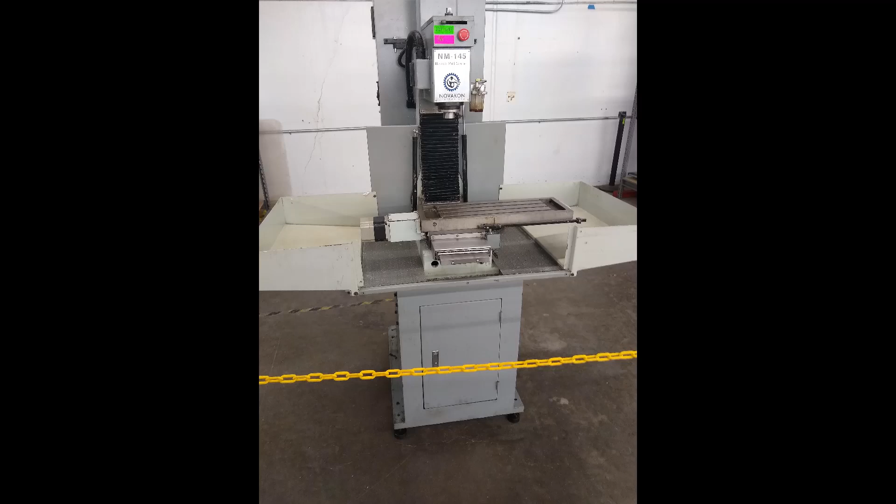Hello and welcome to my introduction to the CNC milling machine at Xerocraft. I'm going to be going over some of the basics of setting up the machine with a bit of an expectation that you've had some exposure to CNC machines, probably the CNC router, in the past.

Now the first step, of course, is to design the CAM or toolpaths that the machine will be doing. And to do that, we're going to get started in Fusion 360. Now, Fusion 360 is a fantastic software that merges 3D modeling with CAM or toolpath generation, and it's a very popular choice in the hobbyist and maker community because it is free for non-commercial use.

I'm not going to go into all the nooks and crannies of what Fusion 360 can do. That is far beyond the purview here, but I'll show you some very basic stuff. If you're unfamiliar with these sorts of engineering softwares, it essentially boils down to drawing 2D sketches and then modifying them, pulling, pushing, rotating them to form 3D shapes.

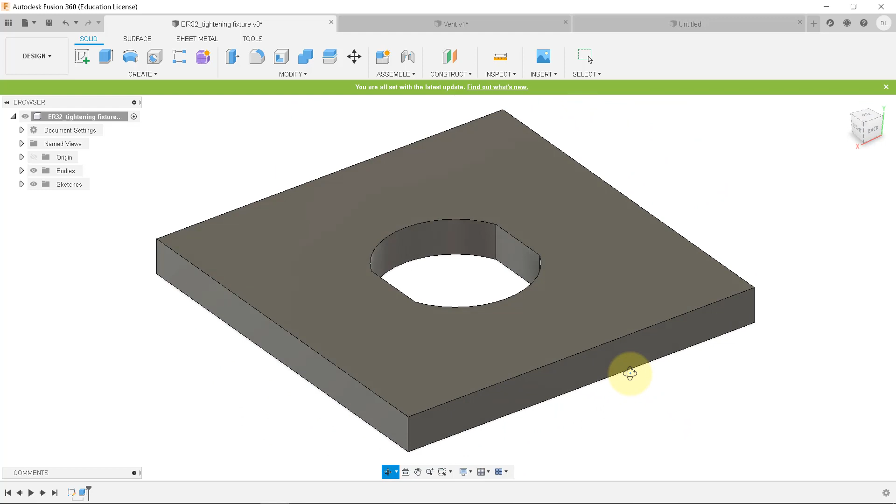And so I'm going to get started by showing you how to make a simple tightening fixture that looks like this. This particular part is very handy when used with the ER32 collets that I'll be showing you in a little bit. It helps to tighten the tools in the collets.

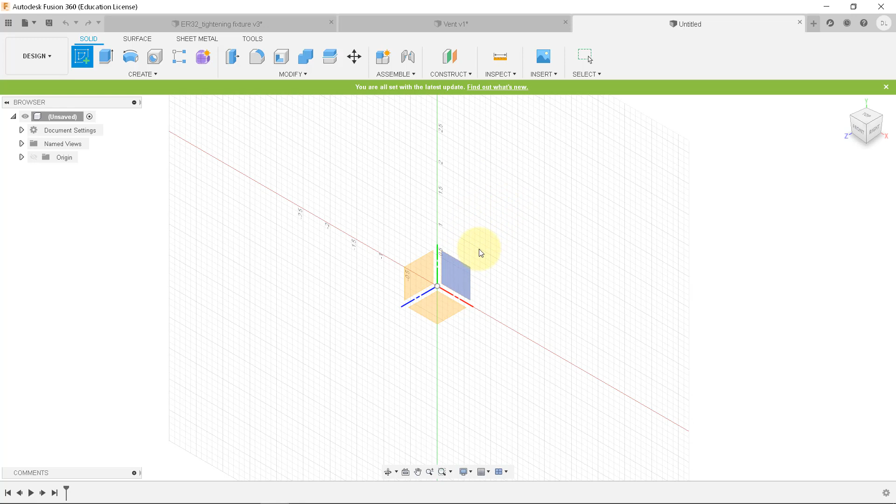So we're going to get started, as we always do, by creating a new sketch over here. The first part of drawing a 2D sketch is to define which plane the sketch is going to be placed on. And so I'm going to start here by choosing this plane. It doesn't really matter a whole bunch when we're first getting started, but I'm now going to use these 2D drawing elements to create my shape.

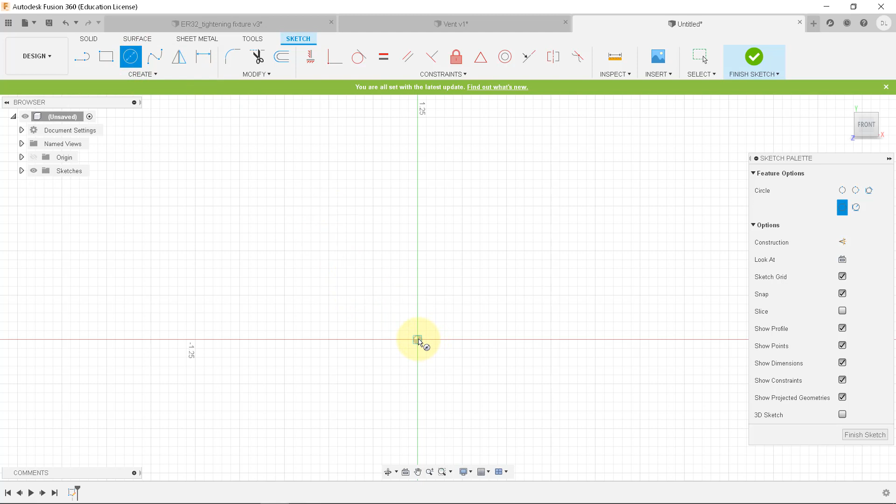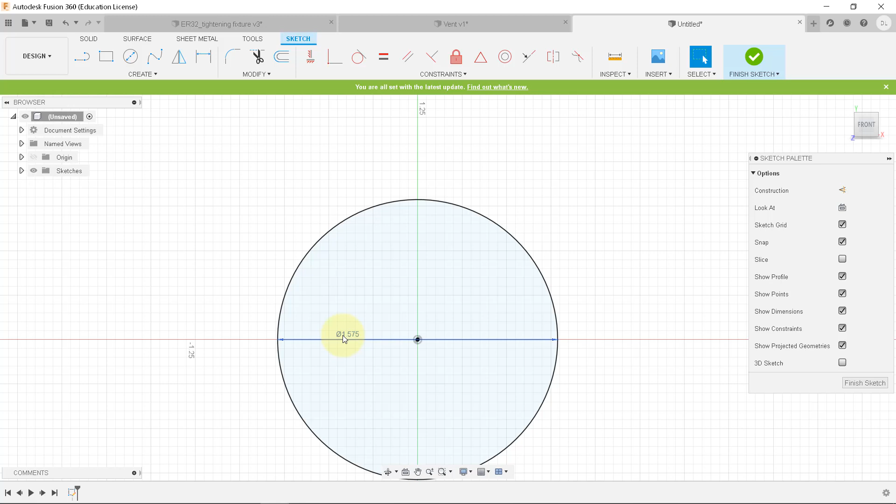So I'm going to first start with the circle, and so I can click once to set the center of that circle, and again to set the diameter, or I can type in the numbers. In this case, I know that that's going to be a 40 millimeter outside diameter, so I can just type 40 mm, and that will set it to be that number. Right now we happen to be in inches. We can change that up here if we want to.

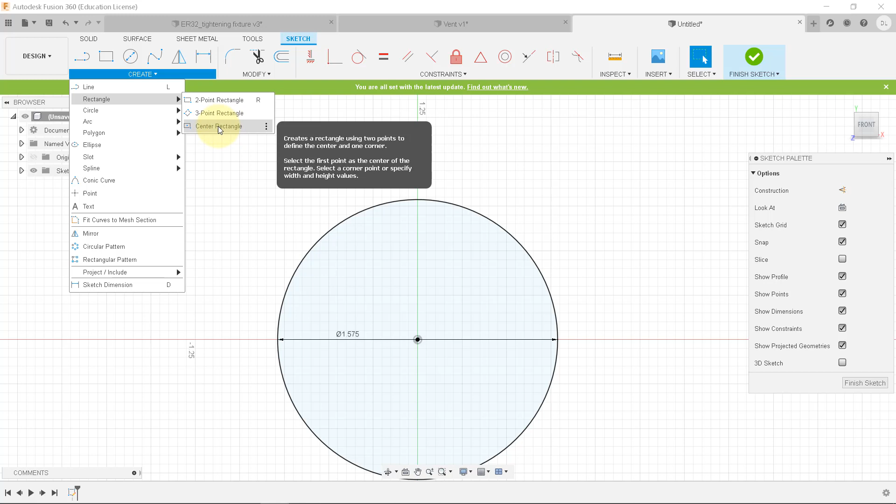The next step is to flatten two opposing sides. I'm going to do that by creating a rectangle. There's a few different ways I can define a rectangle, and for ease here I'm going to set this to be a center rectangle. So again, I'm going to click to set the center, and then I can either draw it out here, or I can simply type this here.

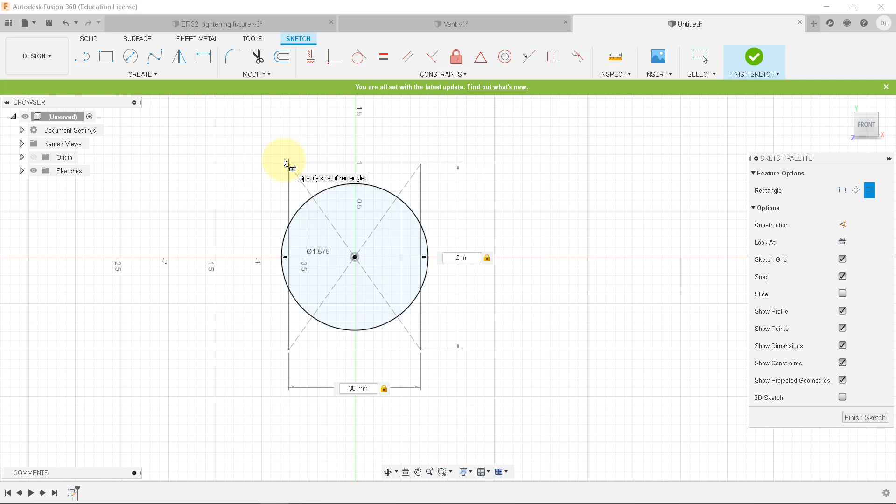Could be something like 2 inches, and then I'm just going to hit tab and switch over, and I know that I want 36 millimeters between the flats, so I'm just going to type 36 millimeters there and hit enter. And so now I have my parent circle and the flats drawn here, and I'm simply going to use the trim command to delete away all the line segments that I do not want.

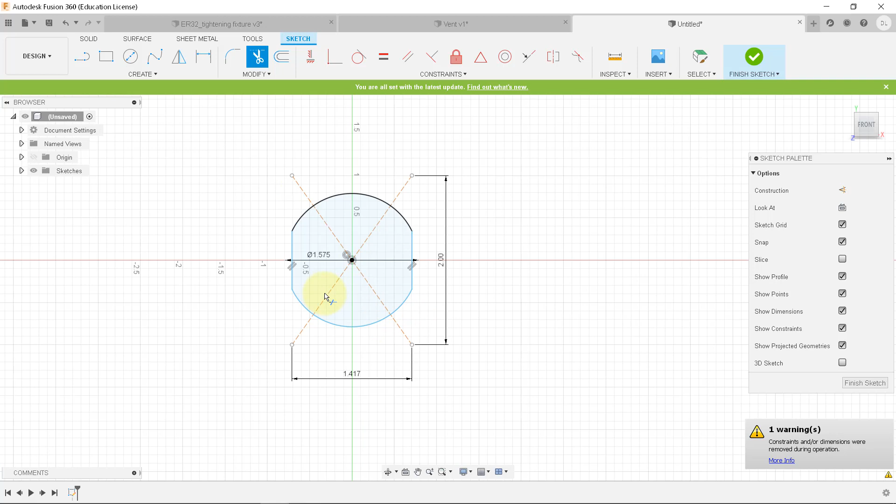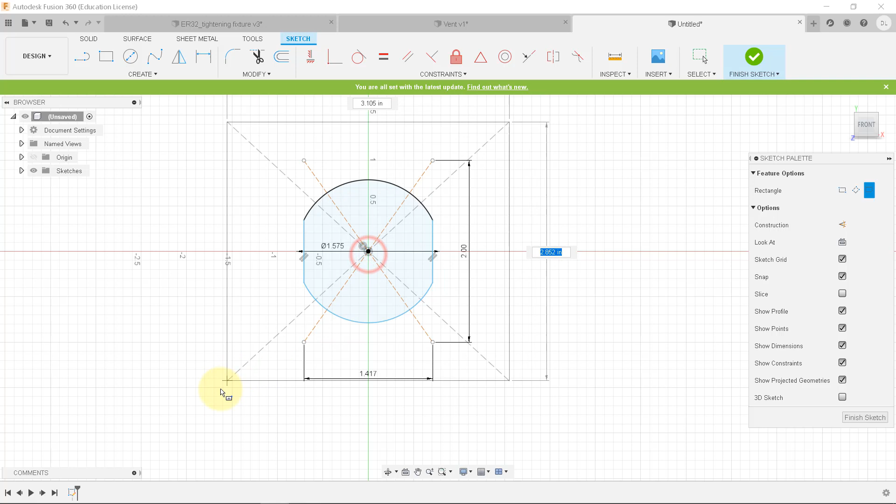So I'm going to delete all of these little extra sketches over here, that and that, and so I'm left with my parent circle with the ends chopped off. And then last but not least, I'm going to want to draw a box around this for the extent of this part. So I'm just going to simply draw another center rectangle, which I will set up here. And this is somewhat arbitrary, but I'm going to make this something like, say, 3 inches by 2.5 inches, just like that.

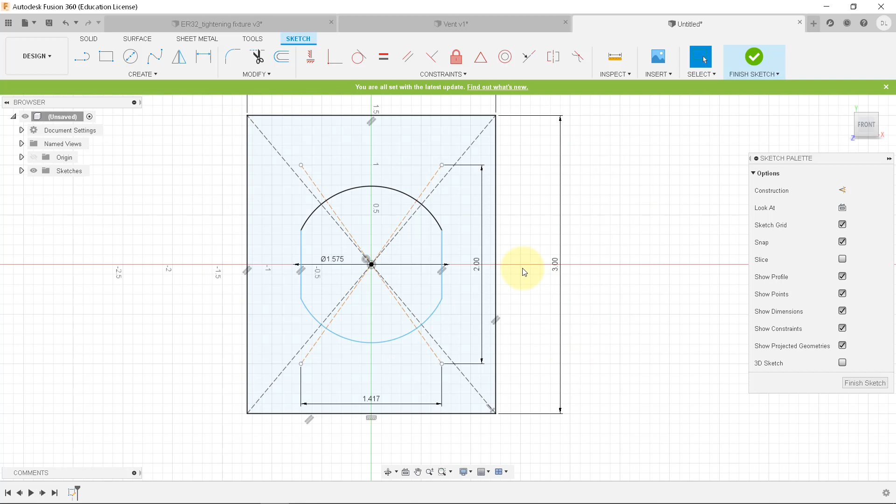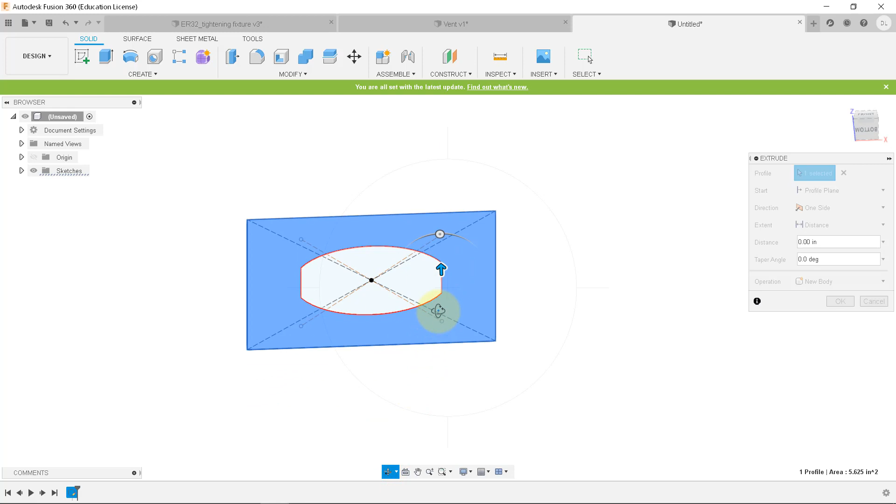And now I'm complete with my part, and so I'm going to say finish sketch. Now I have my two-dimensional sketch, and I'll do the most common thing to do, which is an extrude. So when I click on this surface here, now that I'm in the extrude command, I can now take that 2D sketch and extrude it into the third dimension. In this particular case, I'm going to use some material that's 3/8 of an inch, or 0.375 inches in thickness. And so I can now say, OK.

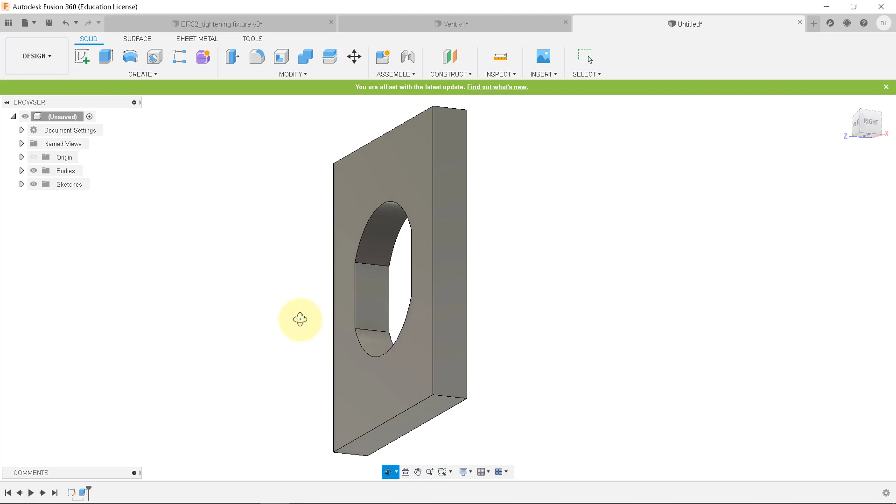And here is my finished design, exactly as I want it to be. And so now my 3D modeling is over, and it's time to switch over to doing the machining part. So that is as simple as going up here and switching from the design view to the manufacturing tab.

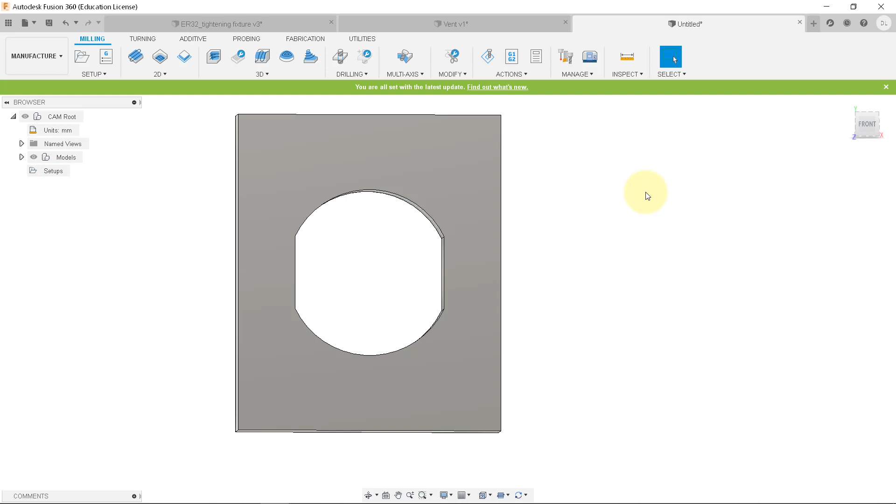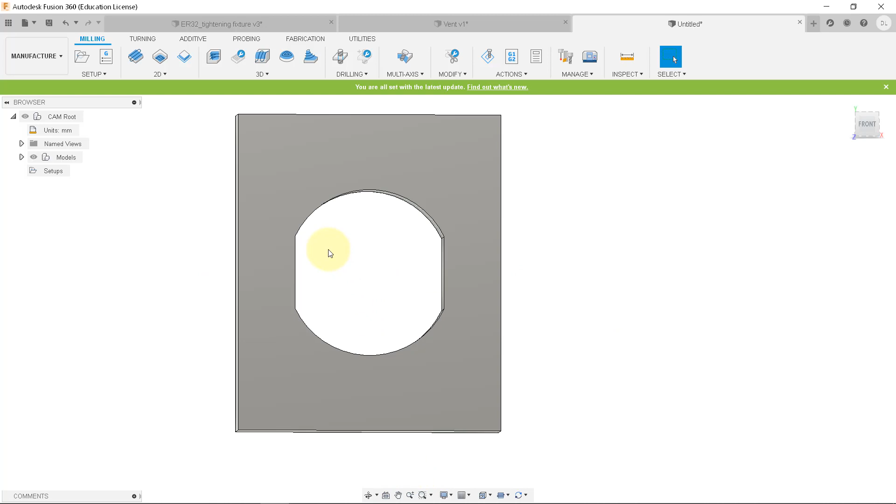And so now we have a whole bunch of new tools up here at the top that will help us set up the machining. And the first thing that we're going to have to do is to create what Fusion calls a setup, which is essentially describing what the material is and how the part is being held in to our machine. So I'm just going to go ahead and click Setup here.

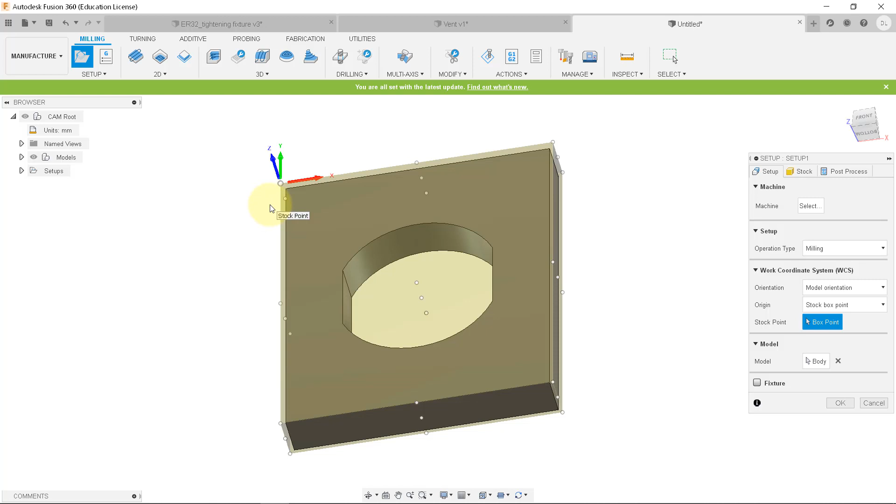Now there's a couple of things I'm going to want to change about this. First off, I'm going to want to use the corner to be the XY 0 point, because it's going to be a lot easier to accurately find the edge of my part rather than the center. The other thing I'm going to want to do is I'm going to want to define the X, Y, and Z coordinates a little differently because of how the machine actually works.

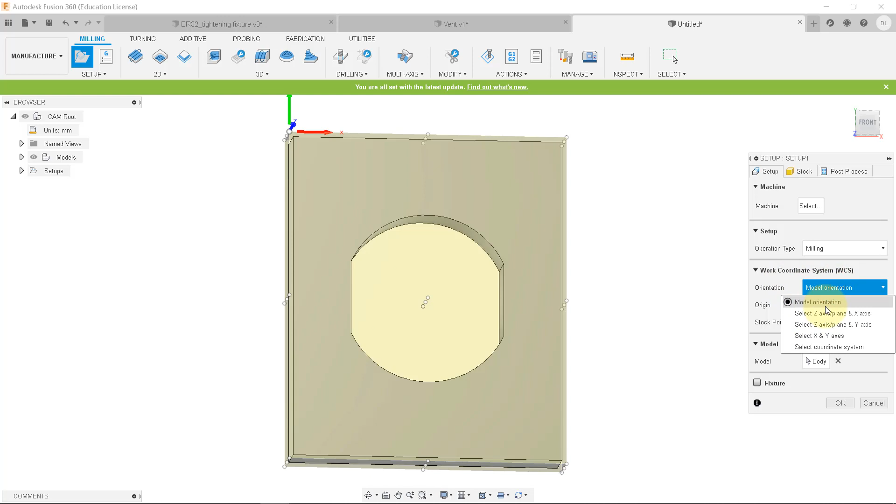And so basically what's going to happen is in real life the x-axis is going to be left and right as we're looking at the machine. The y-axis is going to be away from us and towards us, and then the z is going to be up and down. So what I can do is I can say for the work coordinate system, rather than having the orientation as it's defined in the model, I can just select my x and y axes.

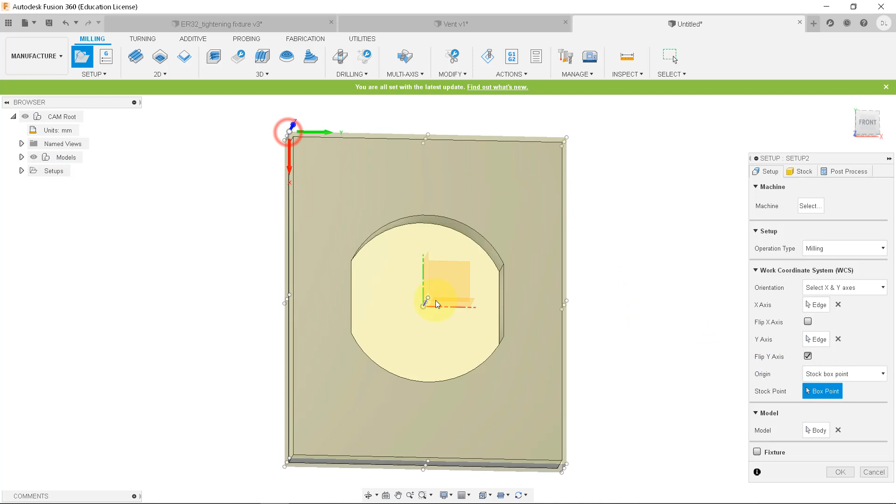So I can force the x-axis to be, say, this edge of that part, and then the y-axis I can force to be this way, which is going to make my life a lot easier. Now it looks like it's moved my origin point, so I'm just going to go back to selecting the stock, and I'm going to go here. And so now I've got it set up as I wanted. My x-axis is going to be running this way along the part, my y-axis going this way, and then z is going to be vertical straight up this way.

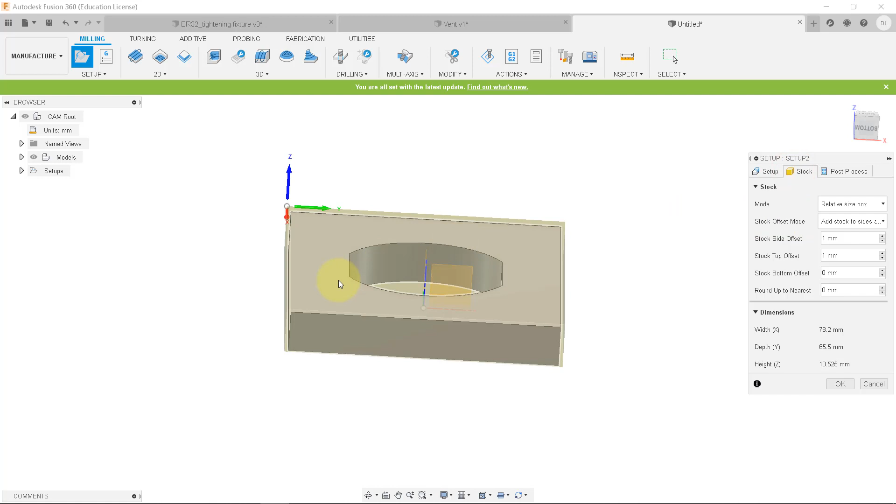Now, the next thing I'm going to do is I'm going to work with the stock itself. Now, it's very important that the software know exactly what size material I'm going to be using, because this program is going to be making assumptions about where it can be moving quickly, safely, and the last thing I want to do is have it think that there's air in a place where there's actually metal. And so it's very important that we give it those precise dimensions.

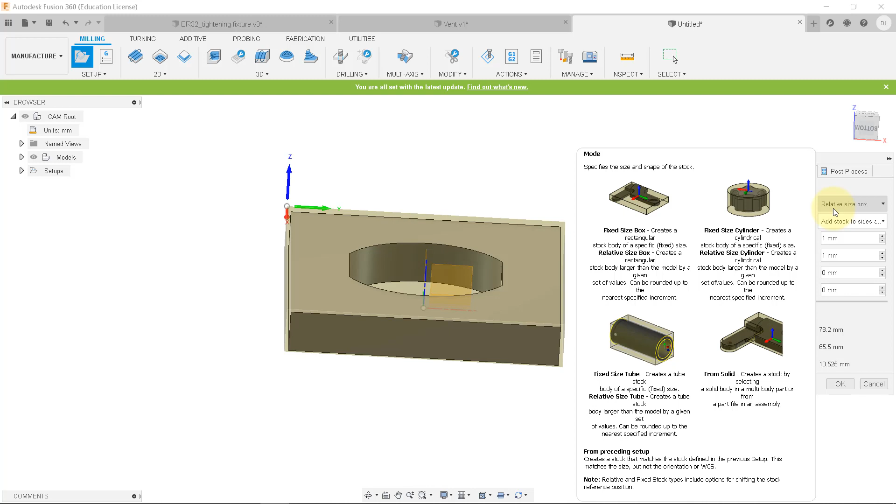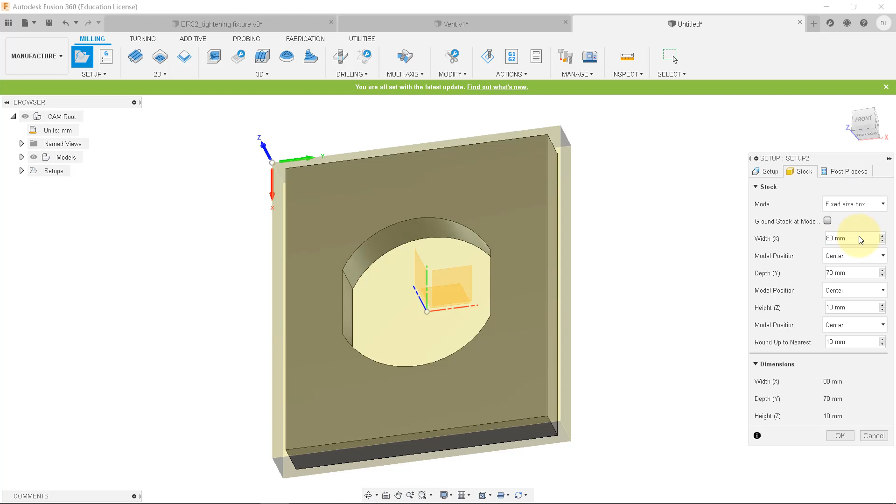Now you can see it's defaulted to a relative size box, where it's just assumed that the material I'm starting with is just 1 millimeter bigger in all the axes than my finished part, which may not be true. And so in my particular case, I'm actually going to go ahead and use a fixed size box, which I can define based on measuring the exact piece that I'm going to use, and that is simply going to be something in the neighborhood of, say, 4 inches wide by a depth of 2.5 inches, and there is my material all set up and ready to go.

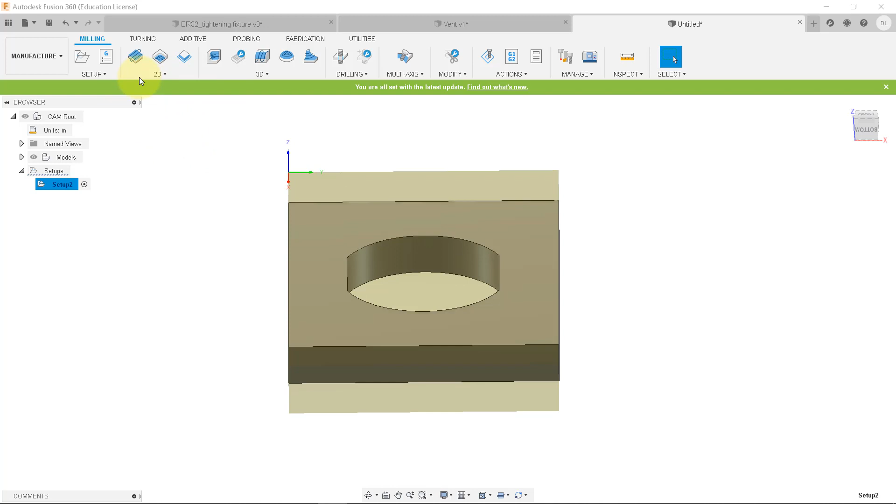Now, because we live in America and all of our tools and setups are going to be in inches, I'm going to switch the dimensions over to inches right here. And now we're going to set up the toolpath to create this pocket here in the middle of our piece. And because this is a two-dimensional type shape, we're going to use the 2D operations and do a 2D pocket.

Now, no matter which of these strategies we use, the first thing that we're going to want to do is tell it what tool we're using. So I'm going to click Select, and that's going to pull up the tool library. And you can of course create your own tools, but the ones built in are a pretty good place to start. So I'm just going to start with a sample tool in the inch dimensions.

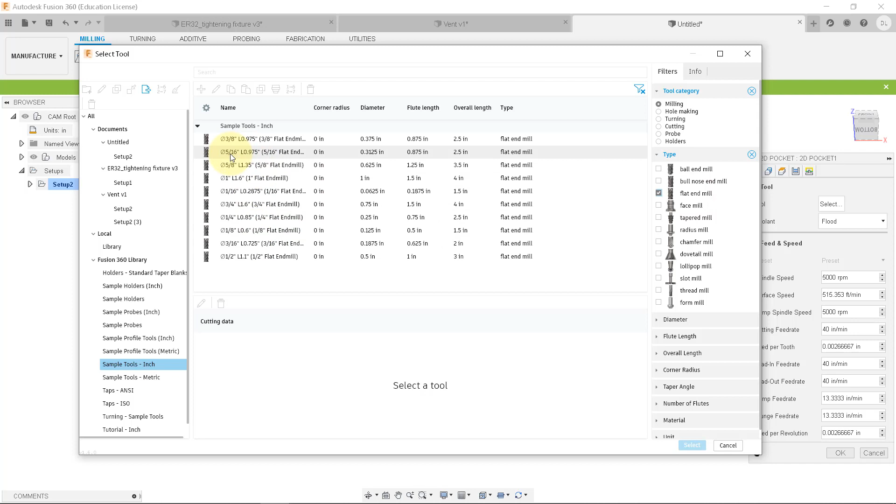I'm going to filter to milling tools by flat end mills, and here is the 5/16 diameter tool that I'm going to be using for this part. And then down here I can select what material I'm using, in this case aluminum, and what sort of strategy I'm going to be taking, and this is going to be a roughing strategy.

And so that has propagated all of these parameters about the tool, both its geometry and how it wants to be run. So I'm going to select this here, and that's propagated all of these feeds and speeds information into our spreadsheet. The problem is that the machine that we have has not got the fastest spindle in the world. And so while 12,000 may be doable, in our particular case the machine can't go any faster than about 5,000. So I'm going to have to change these numbers here to about 5,000 RPM.

And what we'll see is that this computed surface speed, aka the speed at the outer edge of the tool, has come down quite a bit, from almost 1,000 feet per minute to 400 feet per minute. This is one of the critical numbers that you'll want to look up if you have to come up with these speeds and feeds entirely on your own.

Now the next thing that I'm going to want to do is, because I reduced the RPM of the spindle, I'm also going to have to reduce the feed rate in order to maintain a safe feed per tooth. This number is again something that you're going to want to look up from the manufacturer of the tool. Generally speaking, a larger tool can take a bigger bite, and softer materials can be chewed more aggressively.

In our particular case, I'm going to go with a pretty conservative 1/1000th of an inch, and that's going to set my feed rate to 15 inches per minute. I could probably take double or even triple that feed per tooth, but I'm going to be conservative here and just go at a relatively slow speed, just so I don't embarrass myself breaking something. So I'm just going to change all of these other numbers to 15 inches a minute, and that's all my feeds and speeds set up.

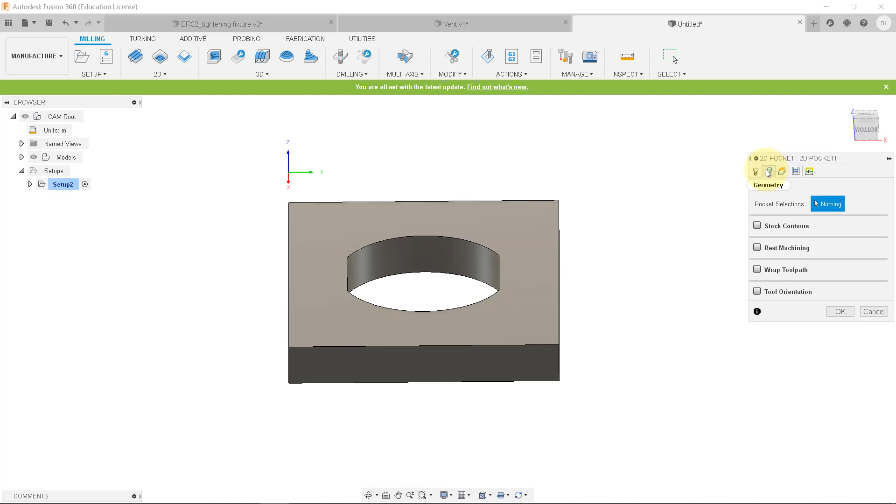Now the next thing I'm going to want to do is choose which geometries to focus on. So I'm just going to select the pocket here to tell it that this is where I want to be doing my machining. I can also set up things like heights, where it should clear to, how far it should go, etc. And I can also set up my passes.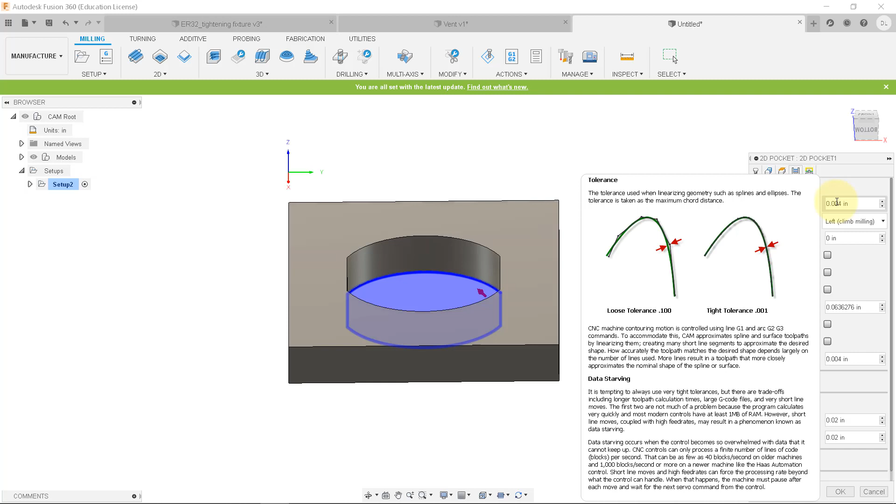This is really handy. This is going to help me out with stuff like how close I should get to hitting the exact shape versus simplifying the geometry by not producing 10,000 points along a curve. I can also do stuff like here, because this 2D pocket is considered a roughing strategy by default, it will leave a little bit of material for us to clean up at the end.

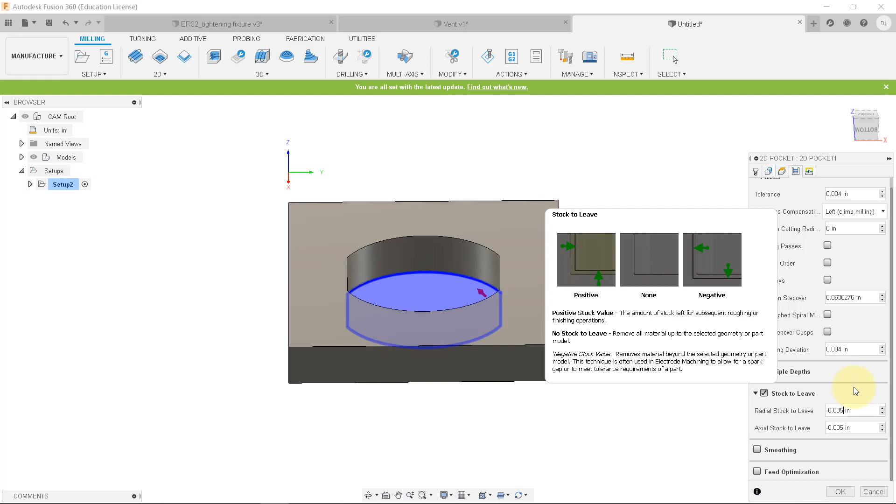Now, I don't actually care. I'm not going to bother with that. So what I'm actually going to do here is not just set this to 0, but because I want to make sure my piece fits, I'm going to choose to have actually a negative stock to leave here. So I'm going to intentionally cut 5/1000ths of an inch past where my line actually is, just to make sure that things fit nice and smooth into there without having too many problems.

Now, I strongly encourage you, when you're doing this on your own, to be pretty confident in most, if not all, of the parameters here. Fusion 360 has some great tooltip advice for you. So if you hover over one of these options, it will pull up a little preview explanation of what this means. It's very important that you understand what it's trying to do, because there are all sorts of gotchas here that you can get yourself in trouble for.

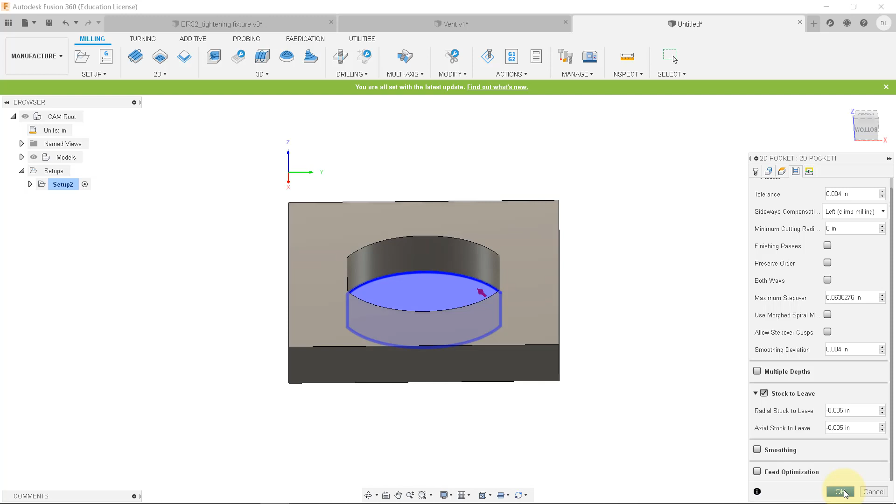So just be a little careful, especially when you're running your first operations. But I'm happy here, so I can simply go ahead and hit OK. And so it's now going to calculate where I should go. And you can see here, here's the tool.

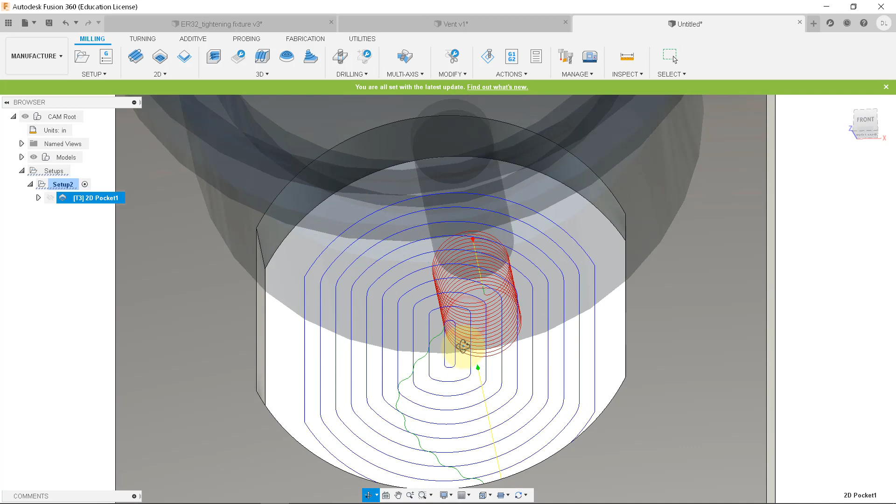What it's going to do is it's going to spiral down nice and slow to form a starting spot for this pocket. And then from there, once it's gotten all the way to the bottom, it's going to make these concentric circle-like shapes until it gets out to the finished dimension, and that is my part.

Now, I could also have this set up to cut the outer edge here, but I'm not going to bother with that. That's just as easily done with a saw or whatever else. I haven't yet decided how I'm going to hold this, so I'm just going to make this part and attach it to some sort of bracket or piece of angle iron or something later on down the line. But this is everything that we need to do here, and so we are done creating toolpaths.

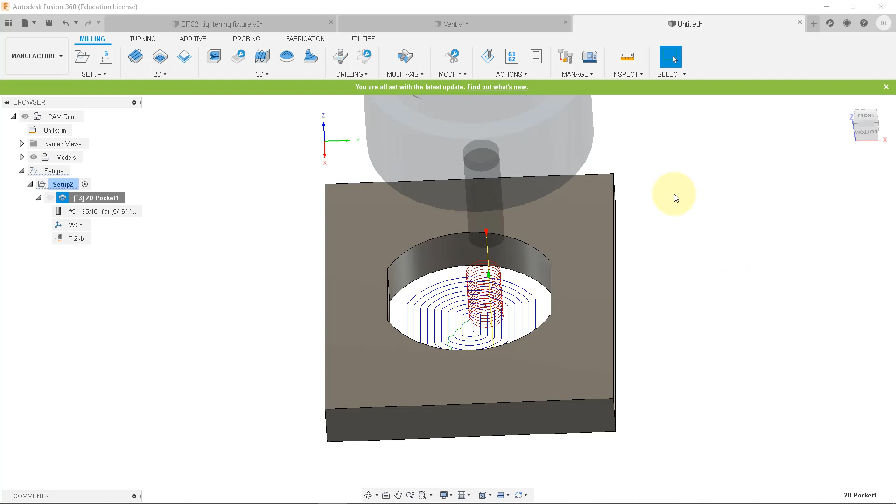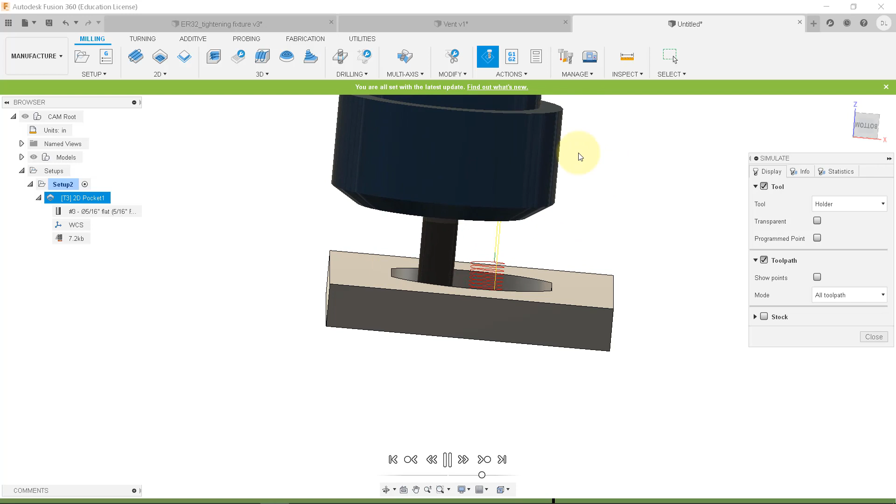Now, one thing that you may want to do is to simulate the toolpath. So if I click up here, I can watch a little video of what the machine is going to do as it's making my part. And so we can watch it as it spirals in. Some nifty stuff: in the tool setup, it's actually got the length of the tool and the geometry of the holder and everything, so we can be really extra careful that we don't crash something into something else. But we'll watch it here as it goes and makes the part, and that all looks like it should come out okay.

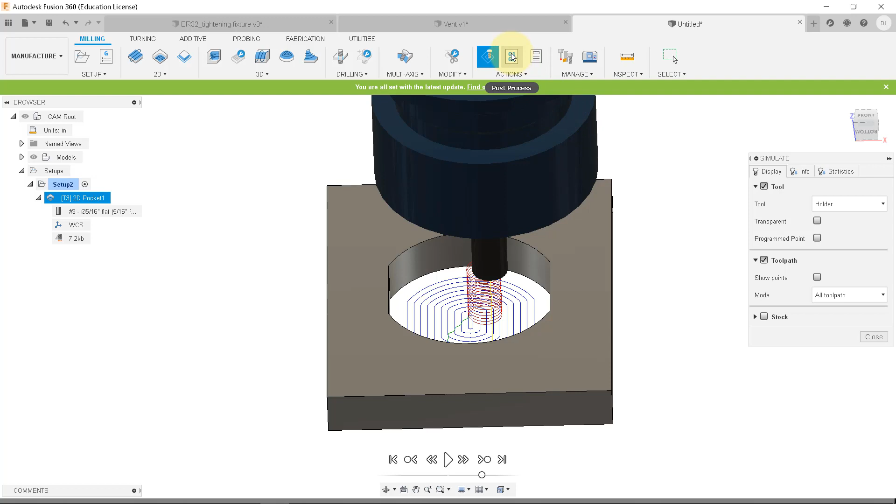And now the last thing to do is to export this G-code. This is called post-processing, where the manner in which it exports the G-code is going to differ slightly depending on the machine and the software that's running the machine. And so while G-code is pretty universal, it's not totally universal, and so we have to be a little careful here. The first thing that we're going to want to do is choose the post-processor that's appropriate for us.

There is a whole bunch of them in here, and while I'm sure one of these is probably good enough, what we really want to do is go and get one of the not pre-installed ones. And we're going to click here to search in their web system to find the one for Mach 4. So I'm going to come here and say Mach 4 mill, and I'm going to download that. And so I can go back into Fusion 360, and now that I've downloaded that Mach 4 post-processor, I'm just going to change the configuration folder from its default to my downloads folder. And lo and behold, the only thing left in my options is the Mach 4 mill. And so now we're pretty much ready to go.

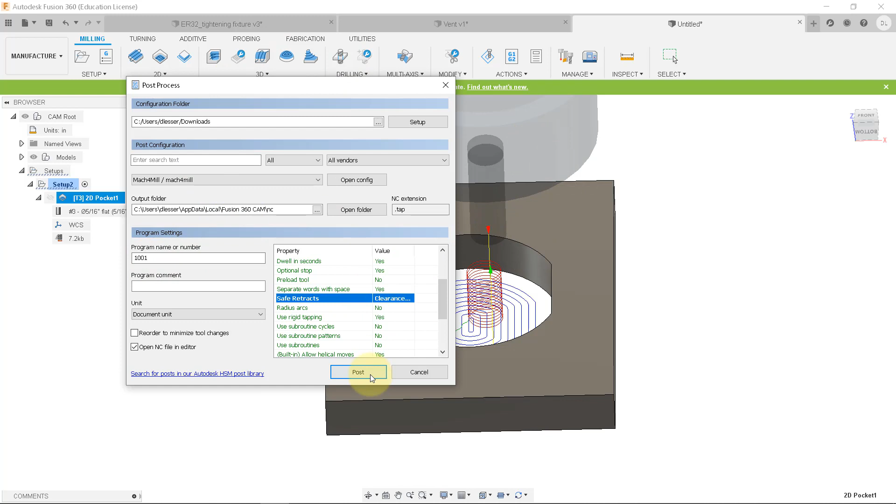The one last thing to do here, which is pretty important, is on our machine, this safe retract here should not be G28. This is a command that will absolutely crash the machine in its current status. So rather than retracting using this fancy G-code operation, I'm simply going to say, hey, when we're done, let's just go up to the clearance height, which I think by default is like a half an inch above the part. And so that's pretty much it. All I have to do is say post, and this will now save that G-code to a file that I can run.

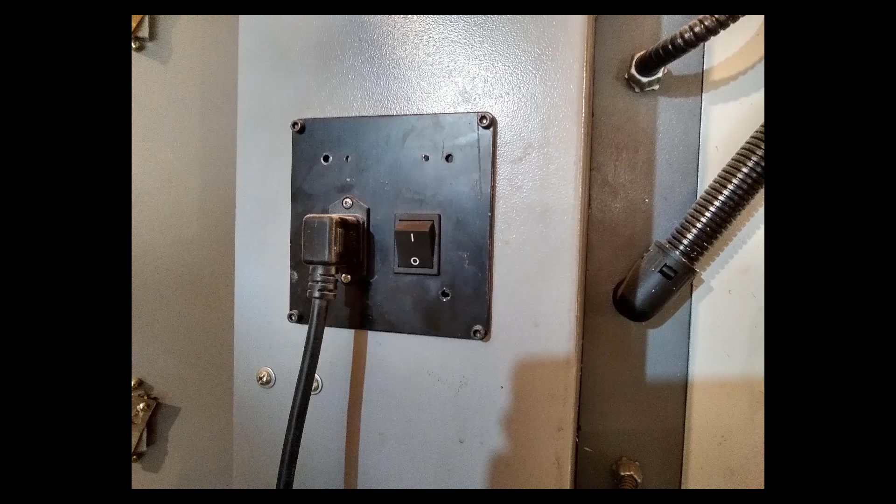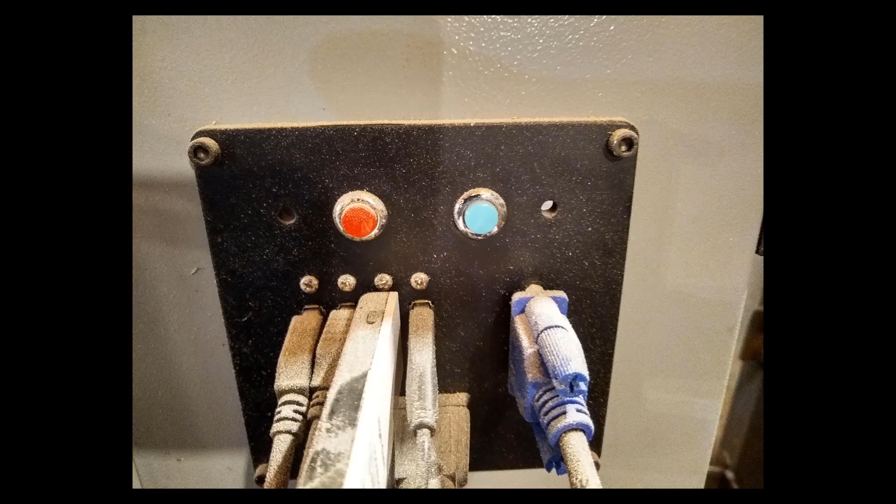So now we'll switch over to the physical part of running the CNC machine, and that's going to start very simply by turning the machine on. Now on the left side, what you'll see is a standard PC power plug along with the main power switch that you'll want to switch on. And then on the right side, you're going to see a whole bunch of computer ports along with 2 buttons, and when the main power is on, if you press the little blue button, that will boot up the PC that runs the machine.

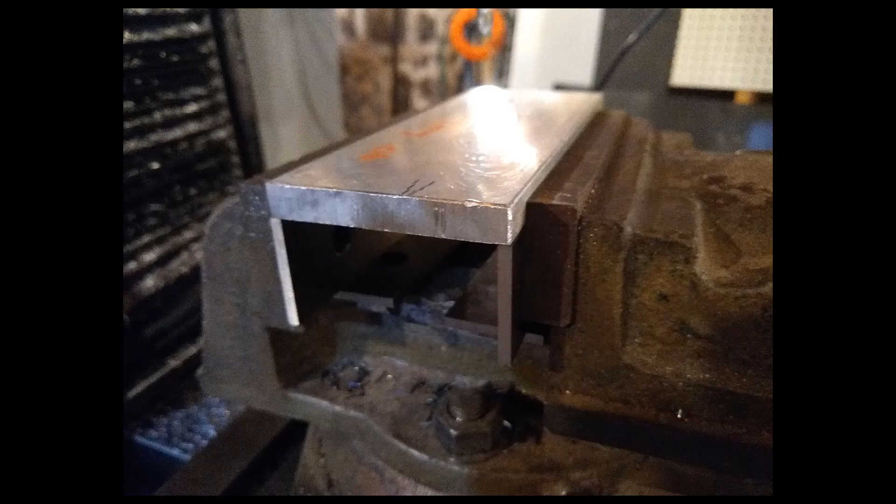Now to hold the part, I'm going to use what's probably the most typical strategy, which is a vise and a set of parallels, which is going to hold the part up out of the vise. You really don't need very much contact with the jaws, but it's very nice to have it sticking proud just a little bit above the jaw height so that I can touch all 4 surfaces. Now that I've got my part fixtured, I'm going to want to turn my attention to the tool.

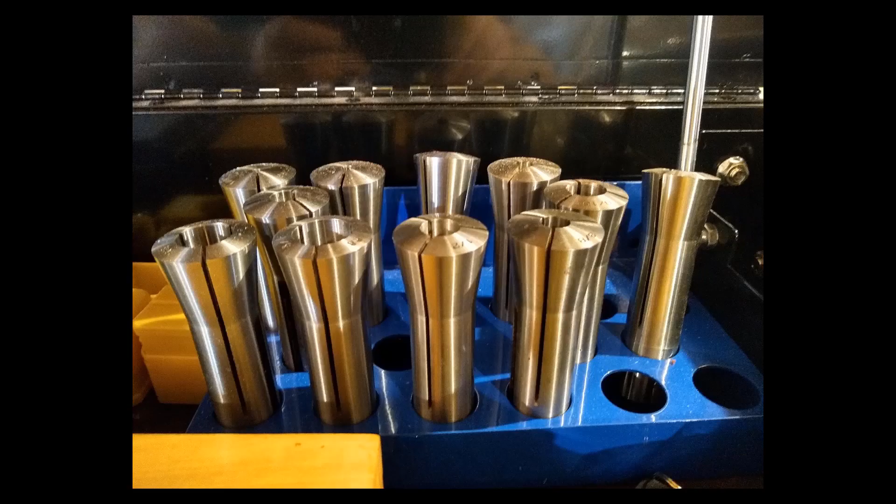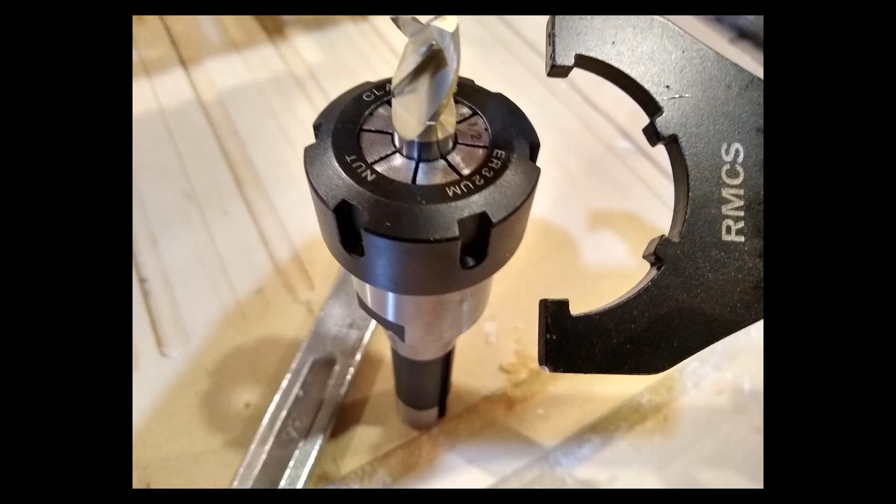Now there's a few different ways of holding the tool. The most simple way is to use a collet like one of these, but for this job I'm going to use an ER32 collet holder, which is going to operate similarly to the ER20 in the CNC router, but it has an R8 shank on the back, so they can be inserted and removed as needed.

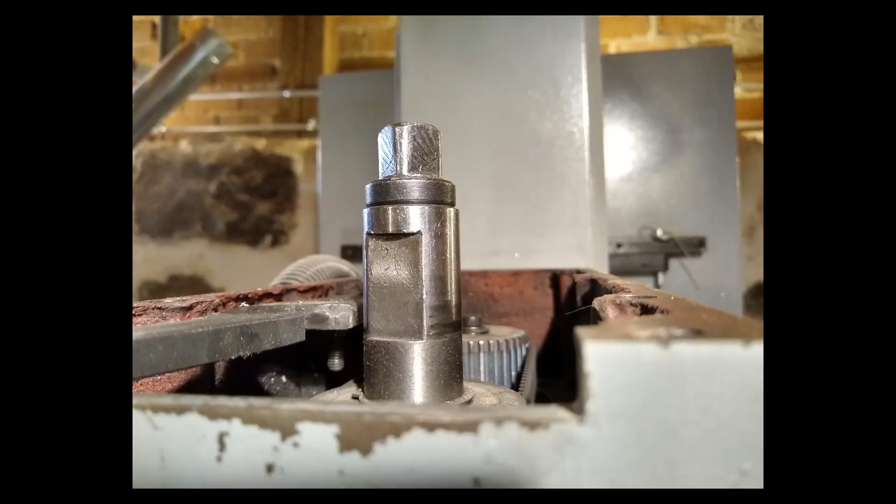To install the collet, we're going to take the narrow cylindrical part and insert it into the spindle. To hold it in place, first we want to tighten the drawbar to take out all the slack, and then to tighten it the rest of the way, we're going to put a second wrench onto the spindle shaft here and tighten the drawbar against it.

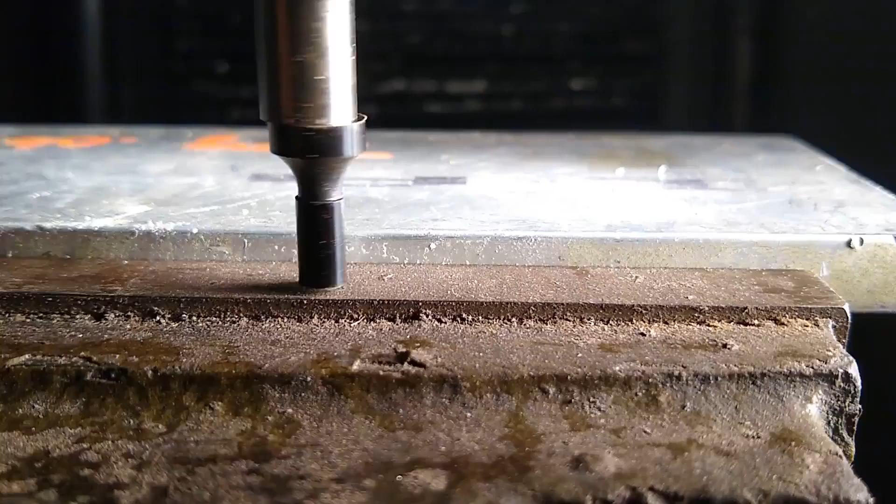Now the first tool that we're almost always going to use is this tool here called an edge finder. Essentially what it does is it has a little part on the end that's not connected to the main spindle shaft and is free to wobble. As we inch it closer and closer to the part, ultimately it's going to pull to the side just like that. And that's going to show that our little cylindrical section is in continuous contact with the edge of the part.

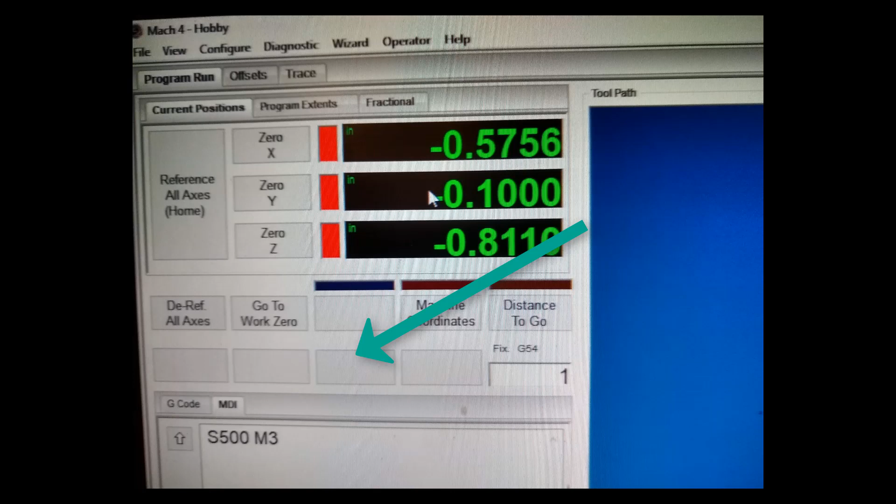Since that cylinder is exactly 0.2 inches in diameter, that means that we can set the y-axis now to be minus 0.1 inches. Another thing to note on this screen here is these edge finders do not like being run at high speed, and so here down at the bottom you can see where I've used the manual data input, or MDI, to manually set the machine to a low spindle speed, here 500 RPM, and turn it on.

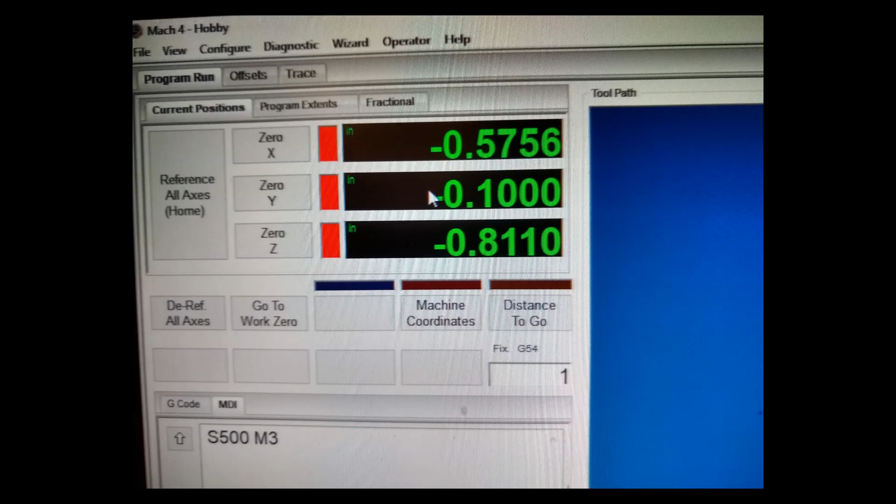Now that the Y is set, I can set the X-axis the exact same way. I'll also configure the Z home using the sheet of paper trick that you've probably seen with the CNC router, just slowly stepping it down in Z by a small increment until it traps a sheet of paper between the tool and the part. All that's left is to load up the G-code using this button here.

We can preview what it's going to do in the top right, paying special attention to the crosshairs to make sure that where we currently are makes sense relative to what it's going to do. And then all we have to do is press cycle start.

Now, while the machine is running, two things to keep an eye on are the feed rate and spindle speed override buttons here and here, which will allow you to, on the fly, change how aggressively the machine is moving. I often like to start these a little bit below 100% when I'm new to a tool or a material or just an overall strategy, and I can always crank it back up to 100% or even over 100% later on if I'm feeling comfortable.

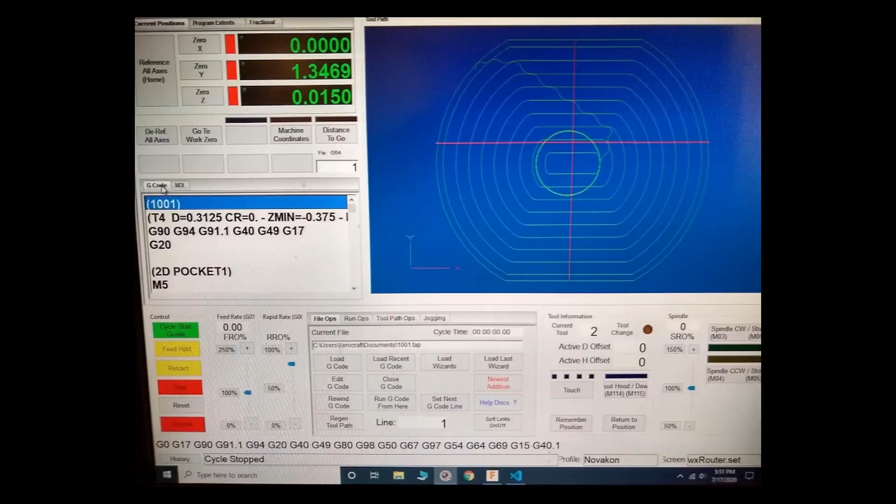And so I'm going to leave you with footage of the machine running this part. Bear in mind this is played back at 2 times speed, just so we don't have to sit here and watch it too long. But you can see it starting off with that slow, gentle ramp down into the part to create that starting hole. Remember that end mills do not like to plunge, so doing this ramp really helps make the tool last a bit longer.

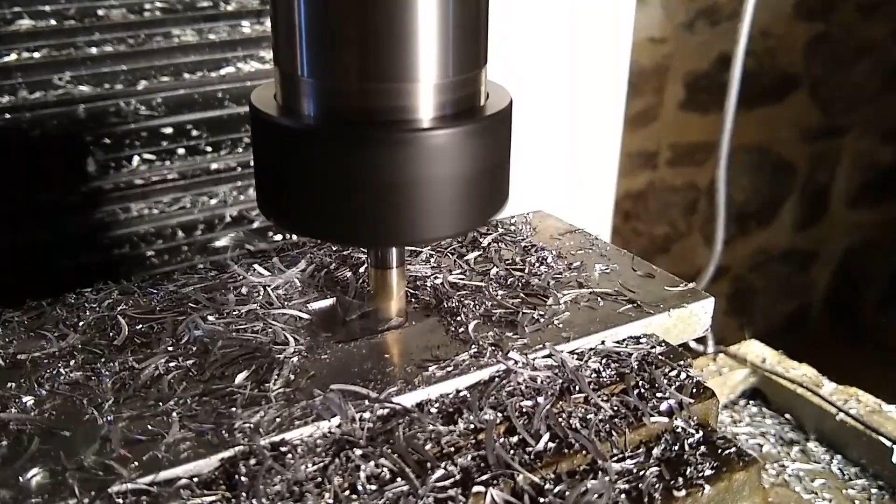And now as it gets towards the bottom of the hole, I'm just going to reset up the camera here, and we're going to see it clearing out that pocket larger with this ever-increasing flattened circle shape. Now, I ought to be oiling the tool as it's running here. Aluminum is very sticky and it loves to stick to the cutter as it's going, but it's difficult to hold the camera and work all this stuff at the same time, so I'm being a little naughty here. But you definitely want to be careful.

Aluminum can very easily gum up the tool and make a big mess. So definitely you don't need lots of oil, but a little bit all the time is a very wise maneuver. So please keep that in mind. It never hurts to have things lubricated, but especially with soft stuff like aluminum, it's a good idea. But that's it.